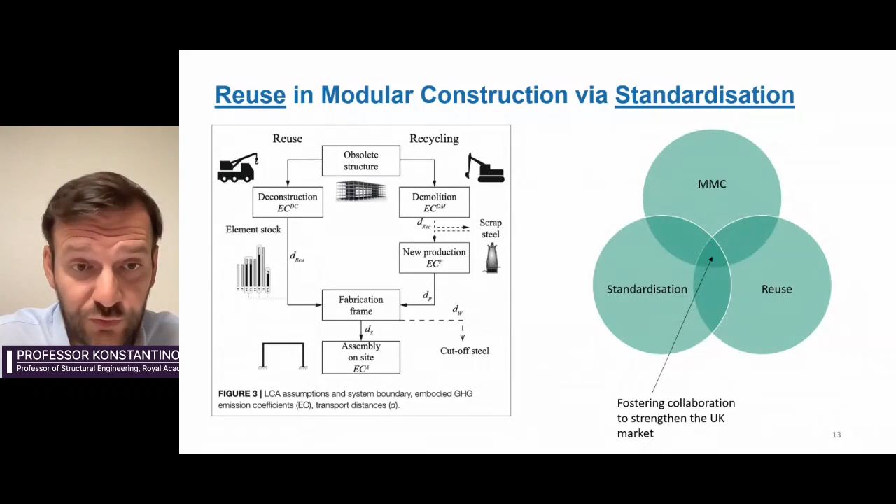So again, as an ambassador of research and an advocate of what we're doing in academia, I believe that collaboration is the key word here in order to achieve something significant and lead the market. So the epicenter between MMC, standardization, and reuse is the collaboration between industrial partners, the government, and research institutions. So next slide, please.

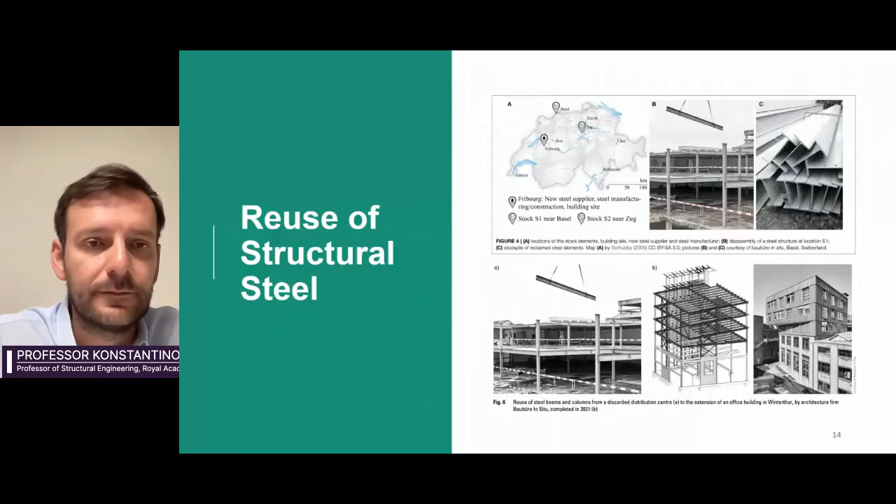So nowadays, we have much more robust and advanced tools to perform the reuse and perform an optimization using AI. So it's not just taking the components from different structures and putting them all together. In terms of optimization, we can optimize the design, the transportation, the demolition processes, the deconstruction, repurposing, production, fabrication, and assembly. So all things can be put in the same algorithms and we can reuse in the best possible way, mindful of the cost implications and the social implications of what we're doing. Next slide, please.

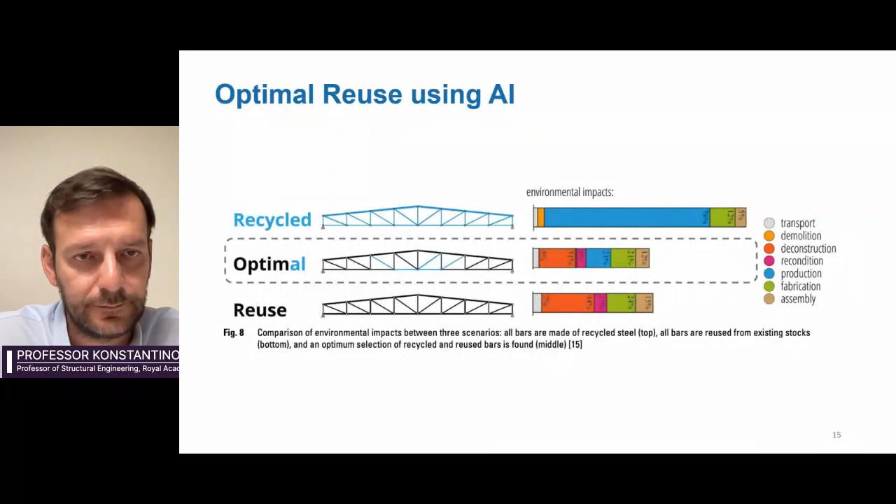So in order to realize that in modular construction per se, we have come up with a new design philosophy, which is the hybrid modular building design. And I'm sure that you've heard that quite a lot. The critical part of this is to split the building, to separate it into two different structures. One is the permanent host structure and the other is a changeable living structure.

So there are components that can be changed all the time, every 5-10 years, whatever the business model is, and there can be other structural components of the host structure that will be changed after the end of life of that structural component. So all that is doable. We have done case studies. We have shown that this is something that can be done. And the key focus of all this is the connections. And that is why in our group, we are dealing mainly with the modular connections.

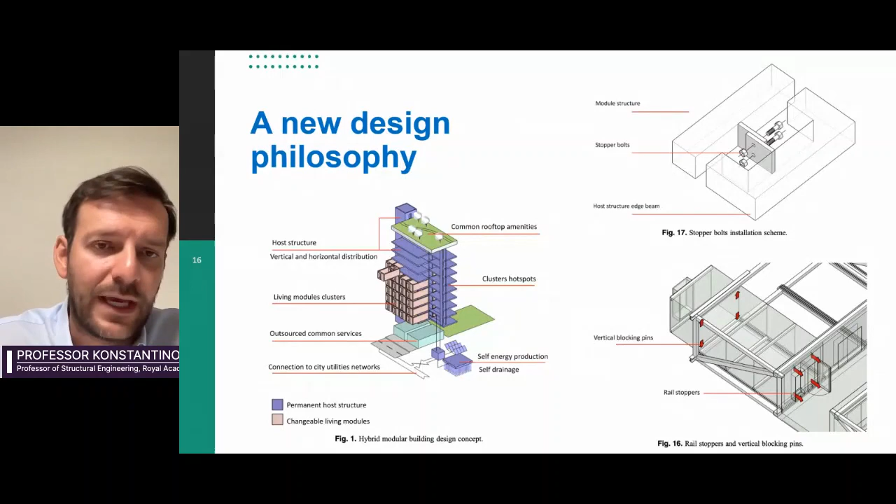So I'm moving on now to the next topic. If you can move on to the next slide.

Yes, please. So we realize the complexity of modular systems, and that's why we design connections for transportation, installation, deconstruction, and reuse damage-free. That's the critical part of the story, that we want to be able to reuse structural components without them having been damaged. Next slide, please.

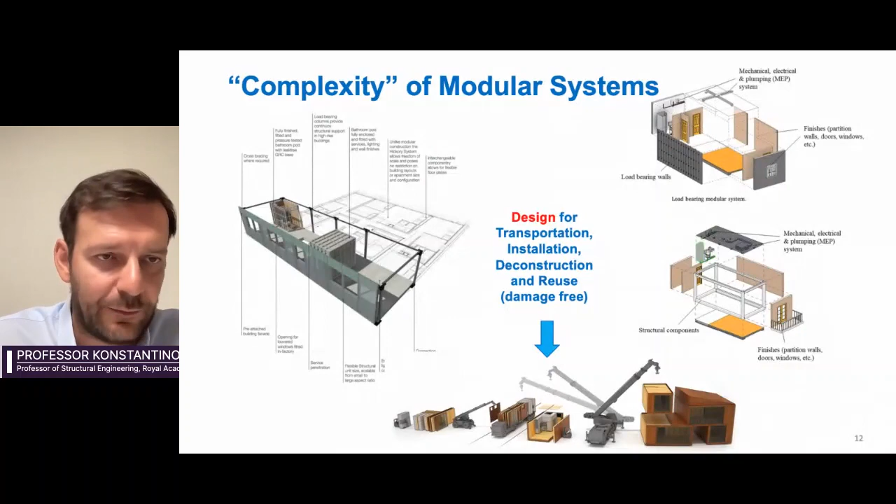And these connectors should also perform for different types of structures, low-rise, mid-rise, high-rise buildings, as well as for wind forces, seismic forces, and progressive collapse. So we're not dealing only with the interlocking mechanism of the connection, but we are designing high-performance connections. Next slide, please.

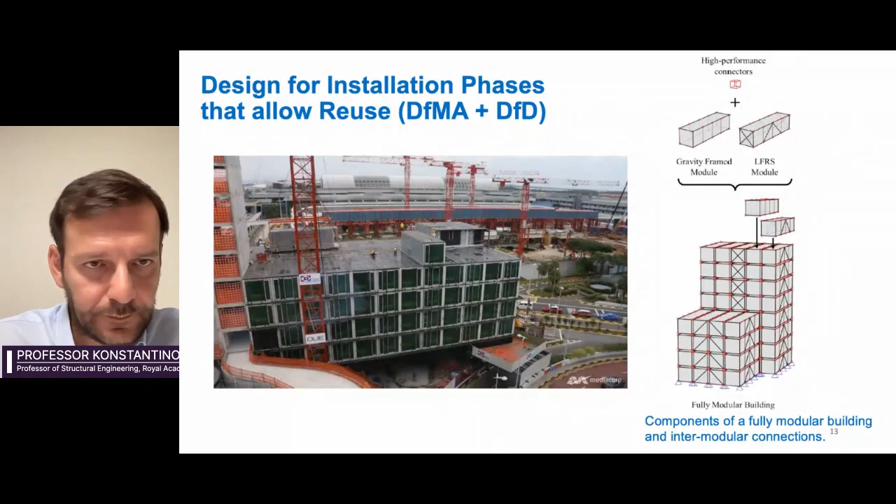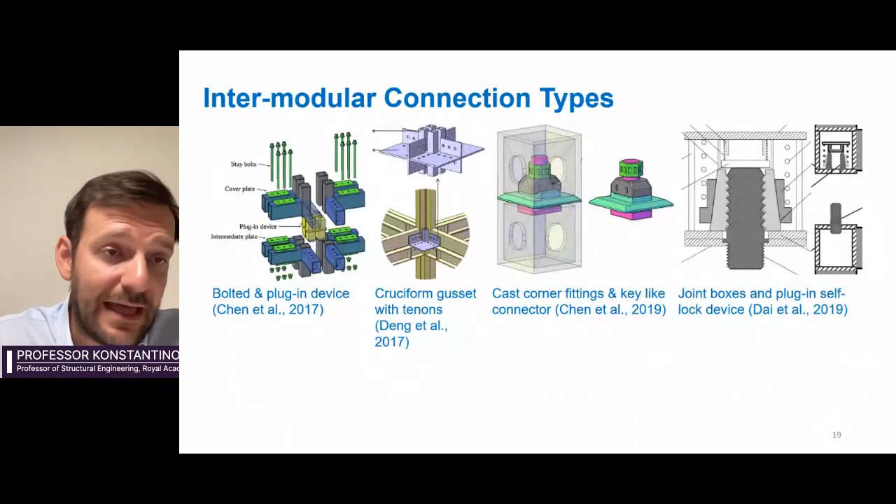So in a very recent study that we've done, we've seen that there are more than 60 different, if you click, more than 60 different joints that have been presented by different manufacturers, different researchers, and different theoretical studies. And we see that as a problem for standardization. All these different joints are completely different. They're very hard to be used. There are no design guidelines, and they're killing the standardization and the reuse purposes.

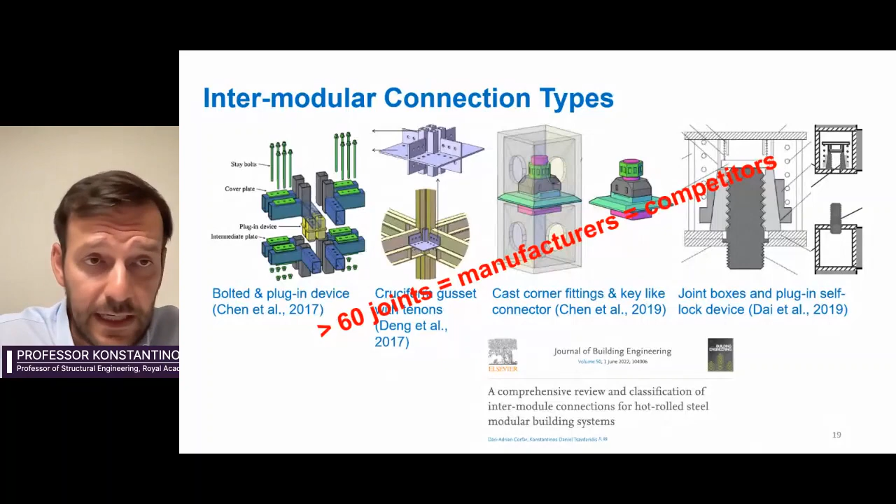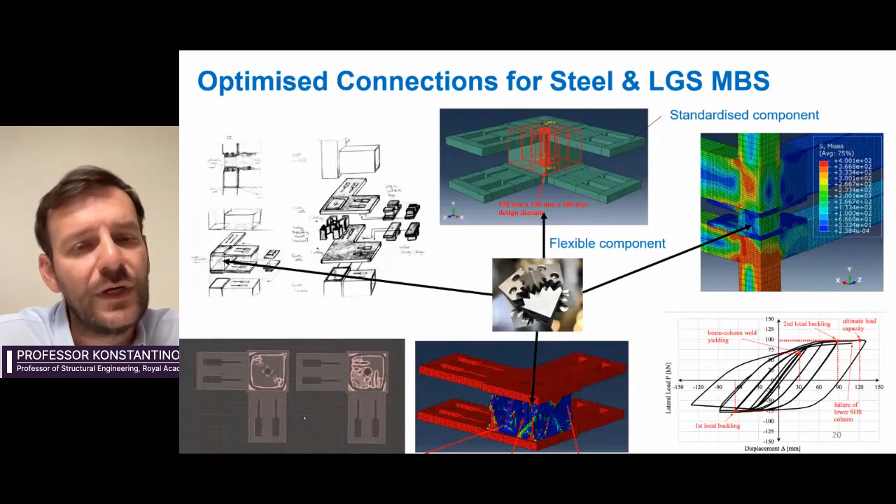Yes. So I've been working with my group for the last 5-6 years on optimizing connections for steel, light gauge steel, as well as timber modular structures, as you will see in the next slide. And what we're trying to do is not only to optimize their performance, but as I said before, to study the fabrication techniques, the installation techniques, as well as the dismantling techniques from different manufacturers, here in the UK but also in other countries, and standardize those processes

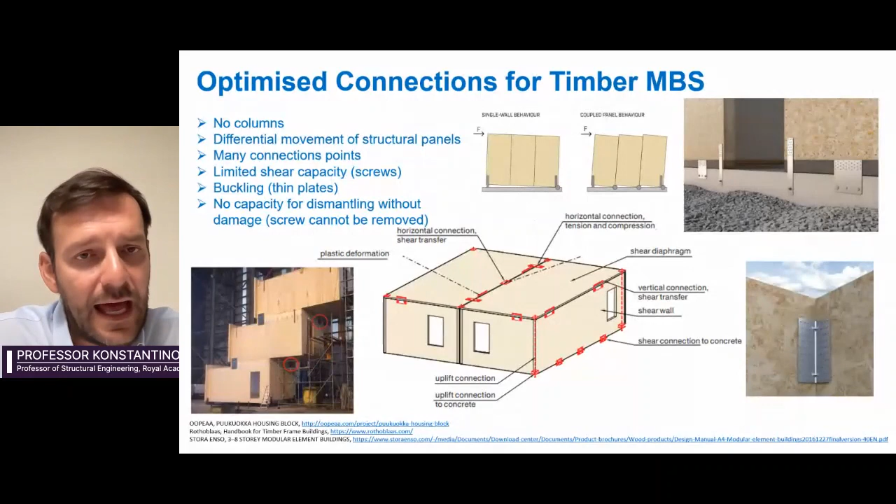in order to help engineers. In the next slide, I think you will also see some proposals that we have made for the installation and deconstruction of volumetric timber modular buildings. The next slide,

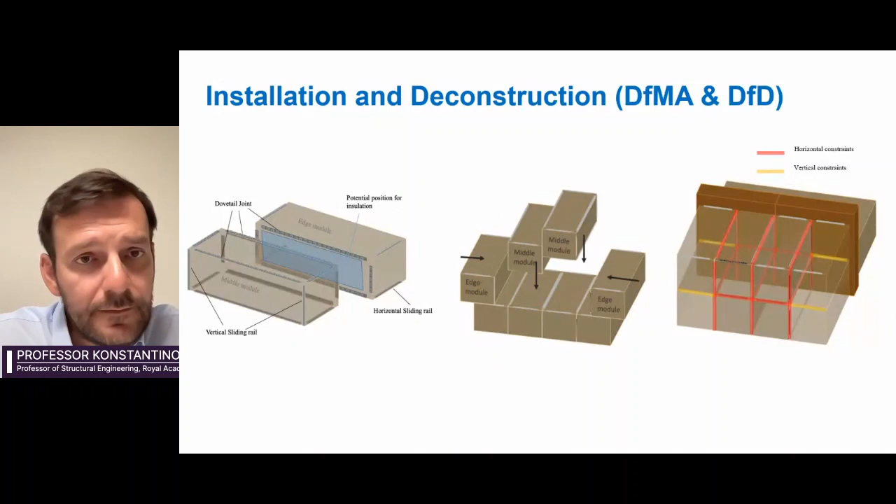you see that we are working on many different types of connections, and we're trying to borrow characteristics from flexible and adaptable connections that are used for reconfigurable structures in order to have a connection that can be a fit-for-all solution for different manufacturers, different fabricators of modular building systems. And I think the next slide as well, if you move on, please.

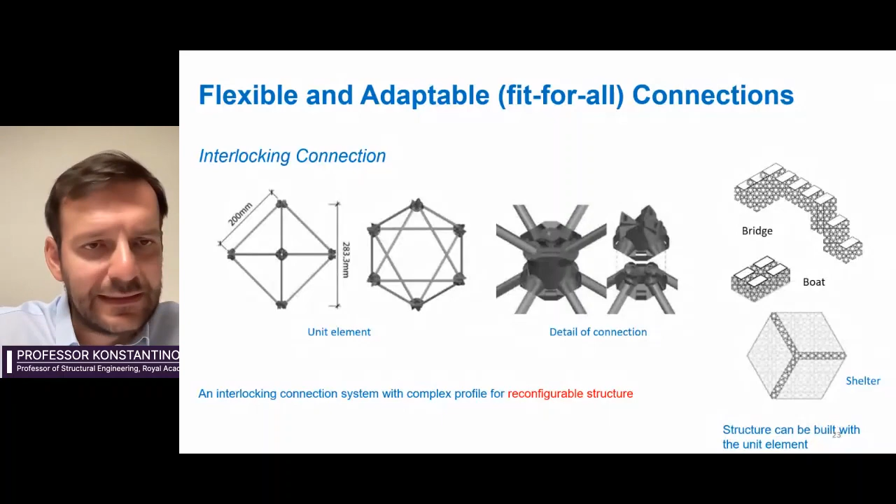Yeah, you will see that we're using different materials. We're using functionally graded materials that have some advanced properties such as negative stiffness elements. We're using shape memory alloys. We're using some advanced properties in order to accommodate the needs of all the different fabricators and make that ultimate solution that can be a fit-for-all solution. Next slide, please.

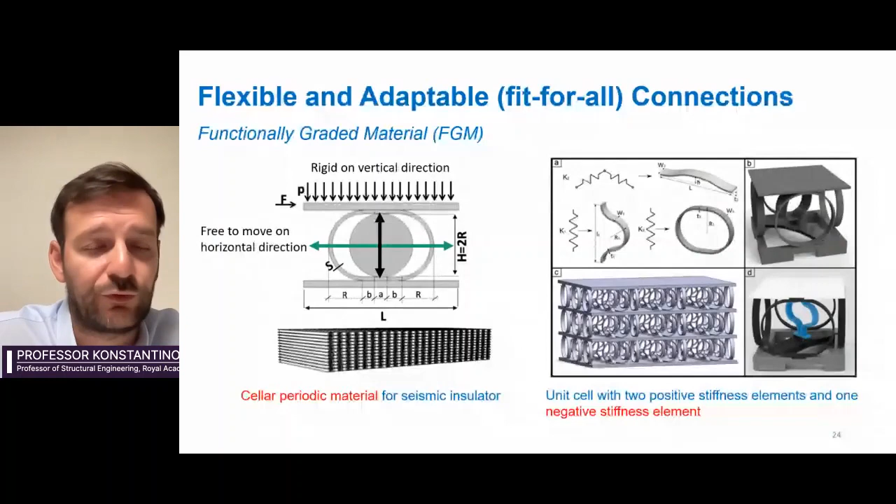So ultimately, and I'm closing with this slide on the research, what we've been doing is designing new types of connections that can overperform for different types of structures and not only perform as connections, but can also be used to optimize the performance of the structure as well as the material that we use in the structure.

So different types of connections, and tuning some properties of those connections, can give us an optimization in terms of the material that we use. And we're building the frameworks and the design guidelines for these practices. So on the next slide, please.

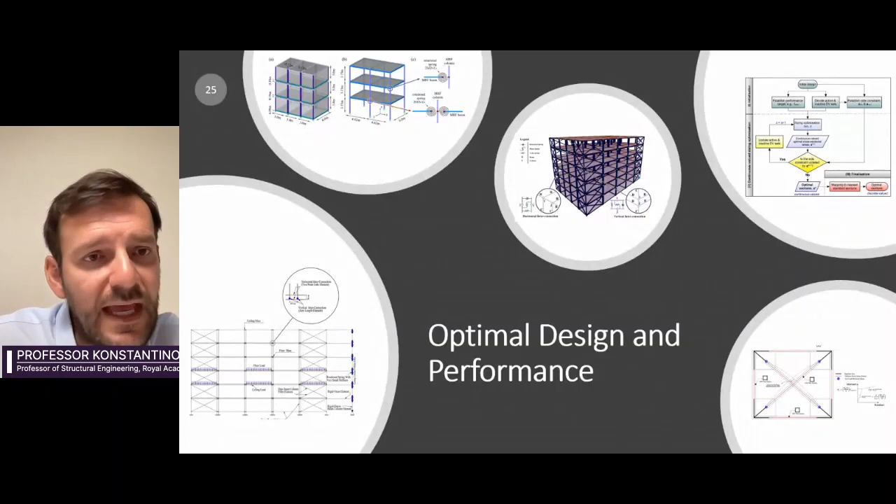Just a little bit about the digital side of things. We have recognized early enough that the construction sector is quite weak in terms of the communication of the sector. And there are some things that we have been using quite a lot, like drones or using BIM or some structural health monitoring. But there are other emerging technologies such as RFIDs or smart sensors that haven't been used a lot. So we're trying to introduce those in our studies and see how much things can change in the next few years.

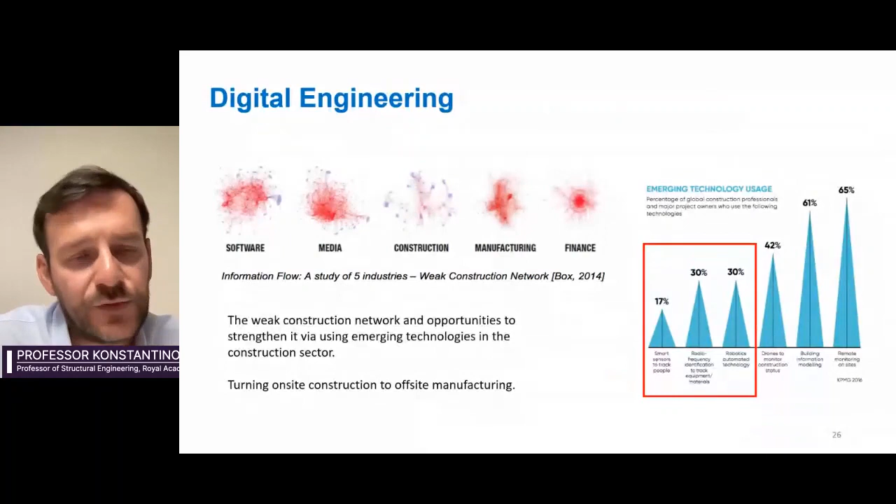So in the next slide, you see a proposition of what we have been working on the last few years, which is how we can enhance the circular economy by track and tracing of the structural components, prefab components used in modular construction, using RFID tags, smart sensors, and BIM. So we have sorted out all these different steps of that circular economy in order to realize the full track and trace of the structural components.

So the structural components are taken down, but then they're characterized. We test their materials. We're testing their properties. We classify them. We have a physical product which has an RFID on it with some data, and a digital product on BIM, and the two of them are communicated. And in this way, we can then exploit all the properties of those elements.

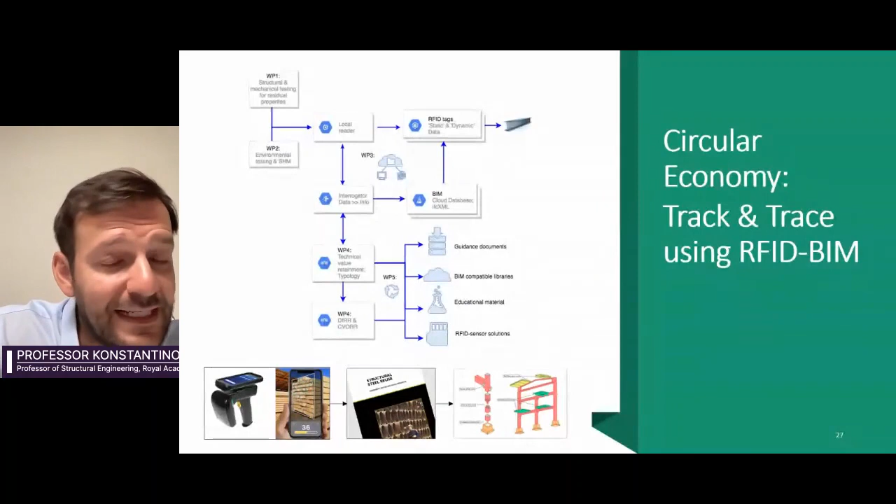So in the next slide, you will see that we've built a kind of classification protocol with different levels of information that need to be stored in these physical and digital, the so-called phygital products. And this information is static as well as dynamic. The static information is information that we store in the phygital twin every single time we take some measurements, whereas the dynamic information is the one that changes by itself over time, by having some sort of structural health monitoring techniques and recording information over time.

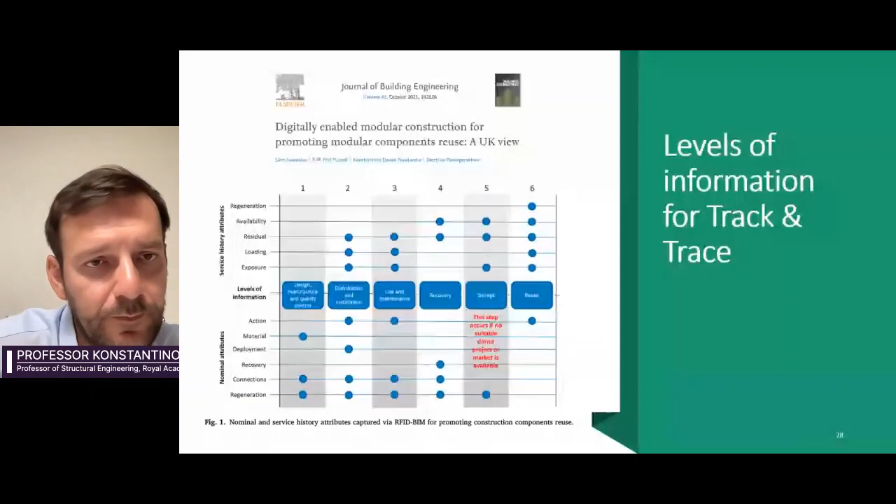So this classified information and the typologies that we build will help us better utilize the phygital product and then enable the reuse of the components. So in the next slides, there are just a few very quick slides where I will show what we're doing in this 3D MBC project. So if you go to the next slide, please.

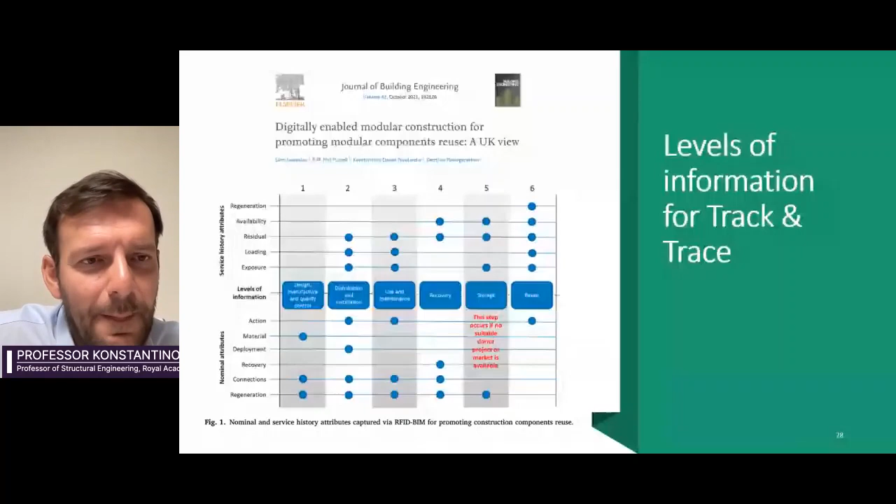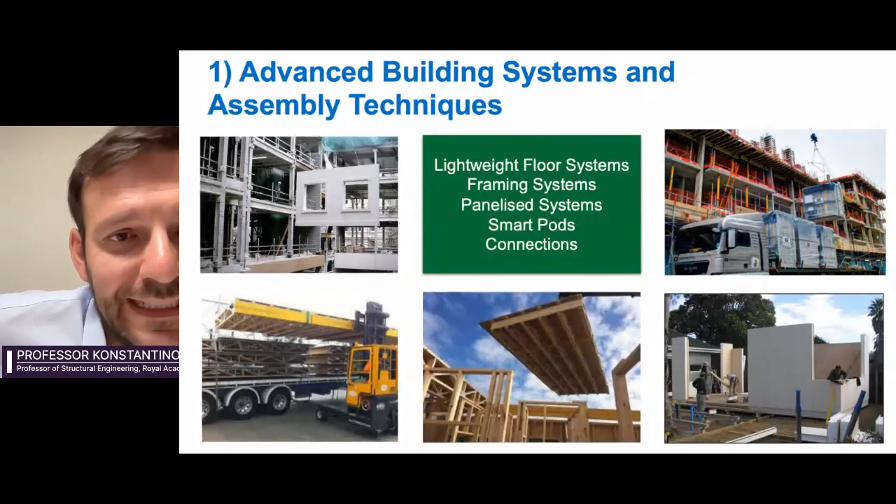If you go to the next slide, maybe you can change the slides pretty quickly. Yeah, thank you. So one topic is about the advanced building systems and assembly techniques. The second topic is on the next slide. Sorry about that, it takes a bit of time to change for me as well. So it's high performance materials for modular systems, and you can see that we're dealing with all sorts of materials: lightweight steel, timber, concrete, and other materials.

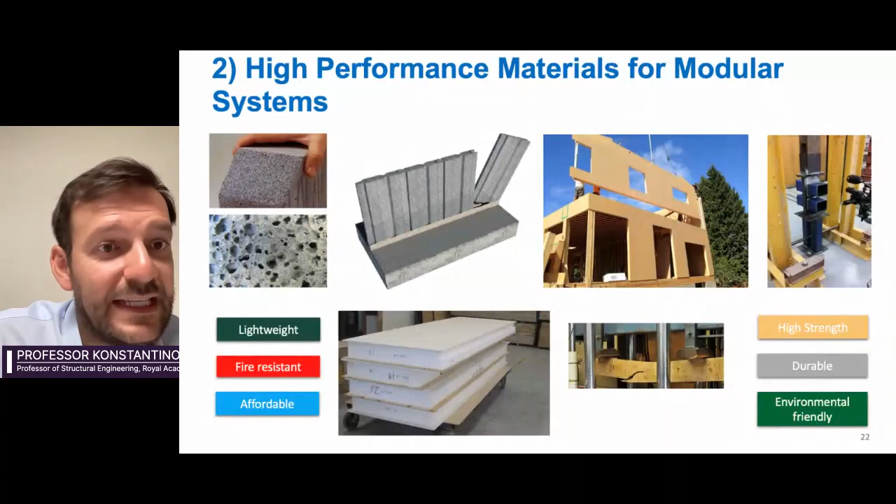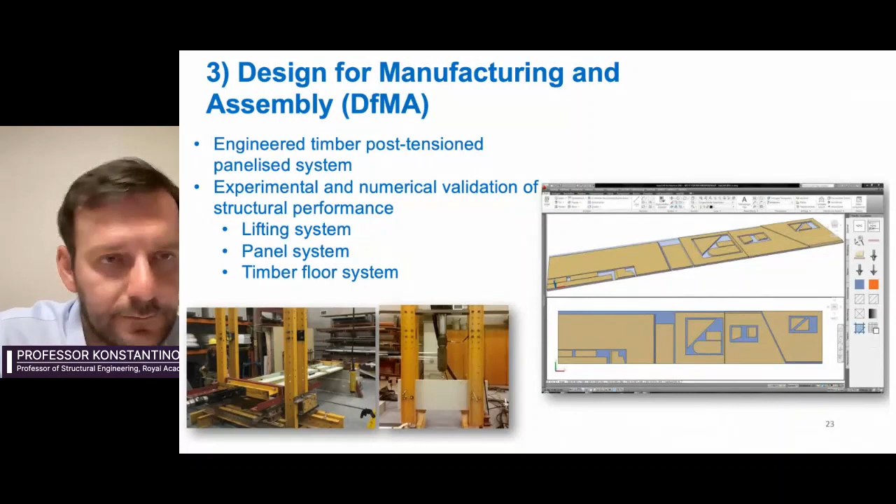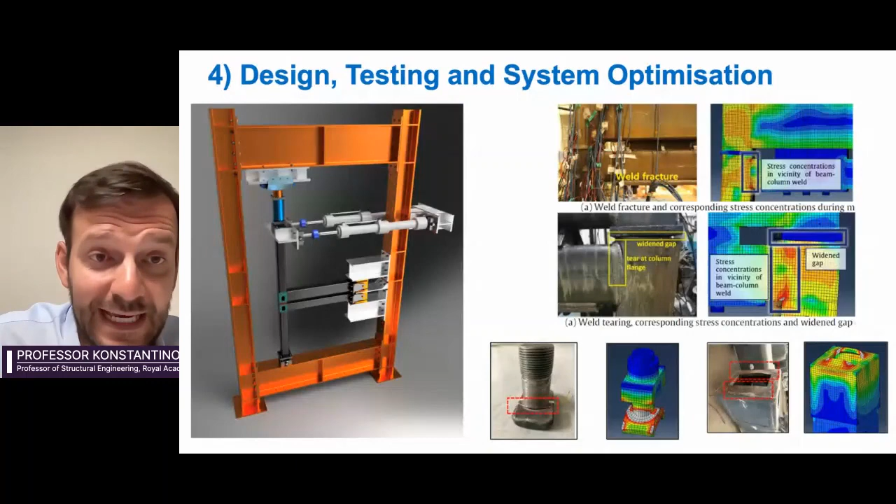In the next slide, you will see that we're working on design for manufacturing and assembly, and we are dealing with different techniques for mainly timber modular construction. In the next slide, we are dealing with design testing and system optimization, and we've been testing numerous types of connections from the micro to meso and macro scale. And finally, in the next slide, are the projects that we're working on, the applications of on-site construction monitoring, as I said before, for gathering and collecting all that information and updating the physical and digital models through the RFID tags and BIM.

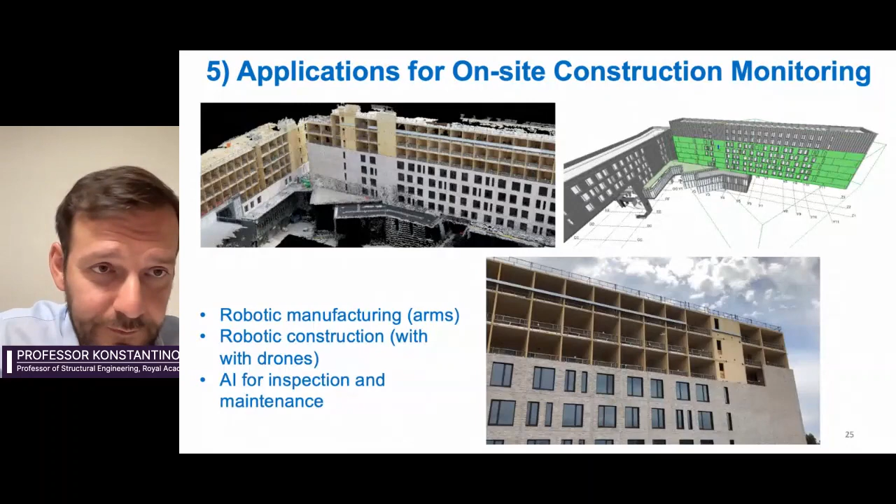So that's it from me. I hope that you have taken some key points out of this presentation. I know it is a bit boring when it comes to research, but there are a lot of things that have been done in recent years.

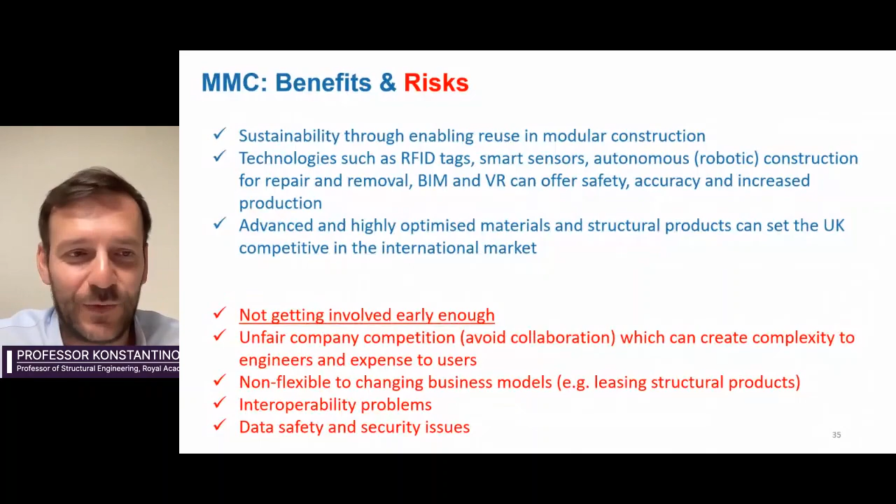Thank you. Thank you so much, Konstantinos. I don't think it was boring at all. I mean, I was particularly struck by the components and how a seemingly small thing like the connections